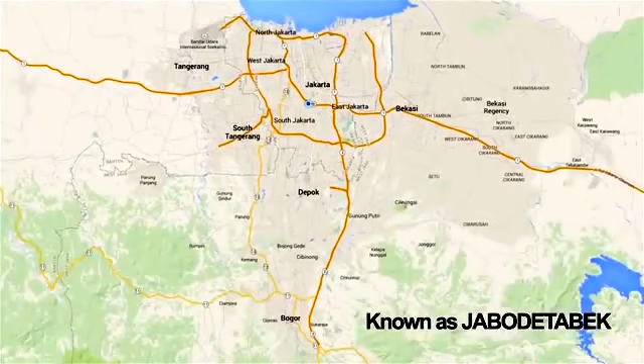Known as Jabodetabek, a name formed by combining the initial syllables of Jakarta, Bogor, Depok, Tangerang, and Bekasi, it is the second largest in the world. Yet the metropolis's suburbs still continue beyond it. With 28 million people in the metropolitan area, nearly 10 million vehicles in daily use, and a limited rapid transit system, Jakarta is strained by transportation problems.

The alternative solution to Jakarta's transportation problem shall be providing mass rapid transit that is environmentally friendly and powered by electricity. By adopting the system utilized in other countries such as Singapore and Japan, the Government of DKI Jakarta established the organization that is fully responsible for all activities, from engineering service and construction through operations and maintenance. The organization is PT Mass Rapid Transit Jakarta.

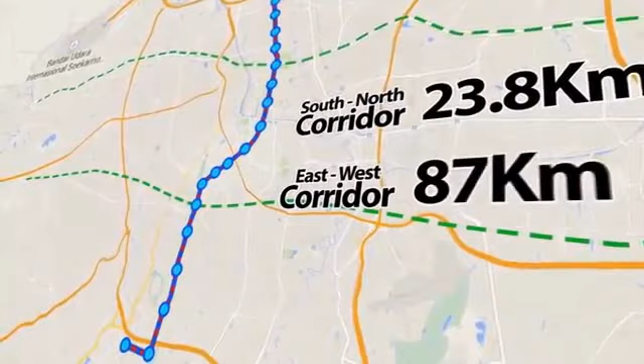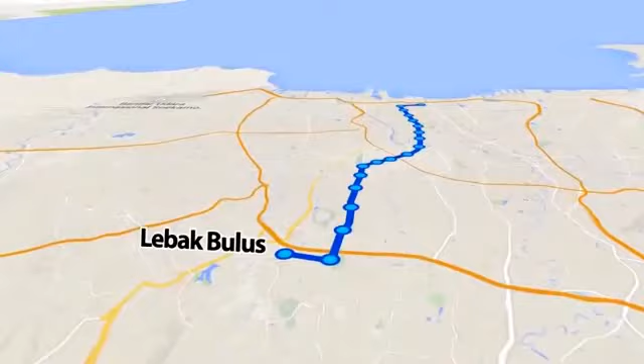Rail-based MRT Jakarta will stretch over 110.8 km of Jakarta roads, consisting of a South-North corridor of about 23.8 km and an East-West corridor of about 87 km. This project is funded through a step loan by JICA and includes the first subway line in Indonesia. The construction of the South-North corridor that stretches along Lebak Bulus to Kampung Bandan will be carried out in two phases.

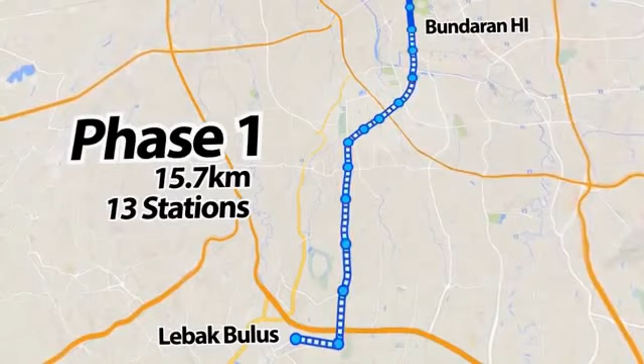Phase 1 will be carried out to connect Lebak Bulus with Bundaran HI over a 15.7 km railway with 13 stations, 7 elevated stations and 6 underground stations, which is targeted to operate by 2018. Phase 2 will expand the South-North corridor from Bundaran HI to Kampung Bandan over an 8.1 km railway, whose construction will have been initiated before Stage 1 operates.

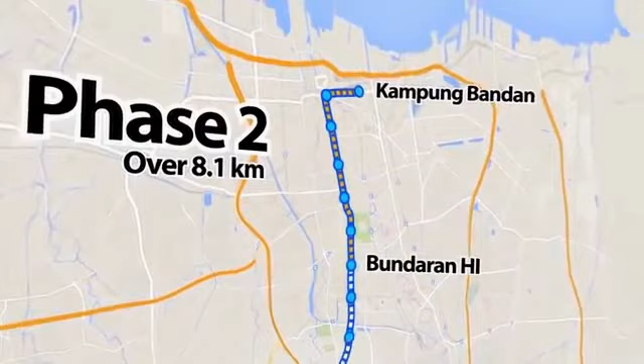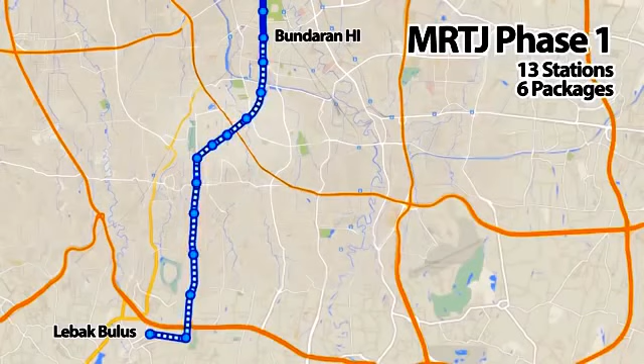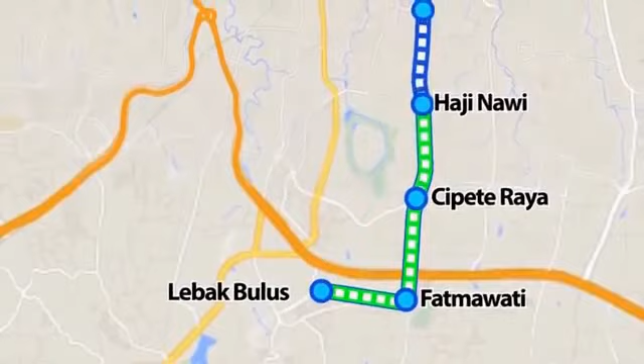The construction of MRT-J Phase 1, which includes 13 stations and 6 packages, has commenced since August 2013. Elevated packages CP101 and CP102 consist of Lebak Bulus, Fatmawati, and Cipete Raya stations along 5.95 km. Elevated package CP103 consists of Haji Nawi, Block A, Block M, and Sisingamangaraja stations along 3.84 km.

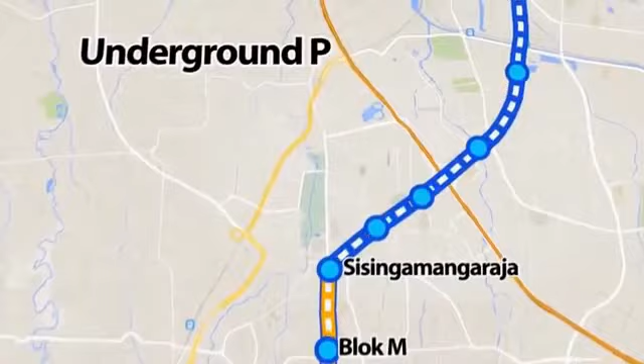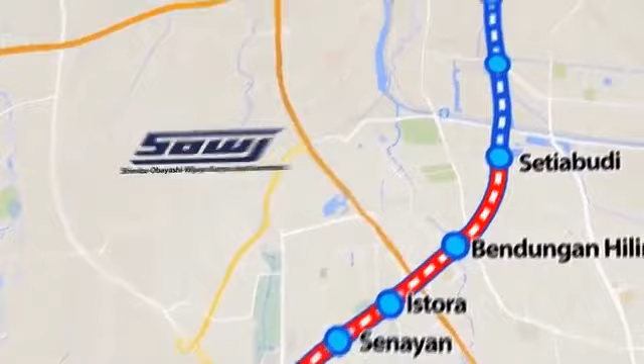Underground packages CP104 and CP105, which consist of the transition area, Senayan, Istora, Bendungan Hilir, and Setiabudi stations along 3.89 km, are carried out by Shimizu Obayashi Corporation from Japan, and Wika and Jaya Konstruksi from Indonesia. Underground package CP106 consists of Dukuh Atas and Bundaran HI stations along 2.02 km.

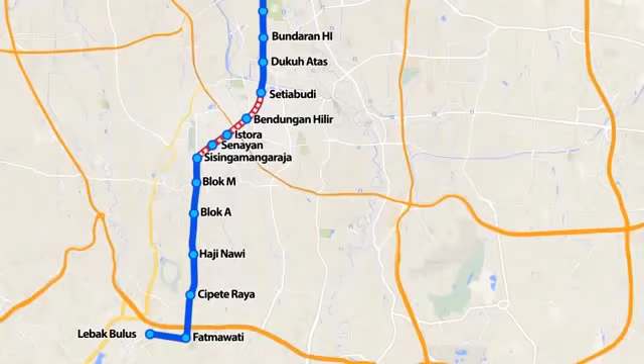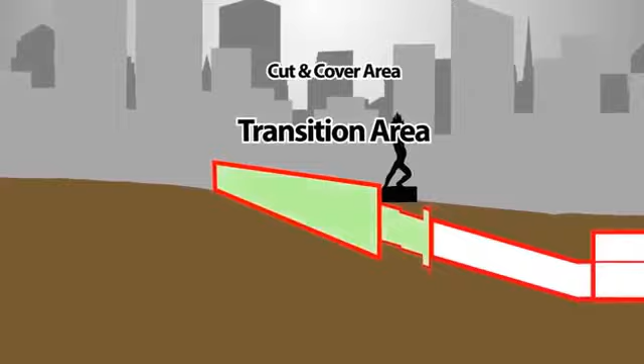SOWJ is the abbreviation of the Shimizu Obayashi Wika and Jaya Konstruksi joint venture, which constructs the CP104 and CP105 packages. Those packages are underground packages that include transition area, station and tunnel construction with a total length of 3.89 km. The transition area, or cut and cover area, will be located from Sisingamangaraja Road until Bundaran Senayan along 460 meters. This area is a transition from the elevated structure of the CP103 package to the underground structure of the SOWJ packages, which will be constructed by the soldier piling method.

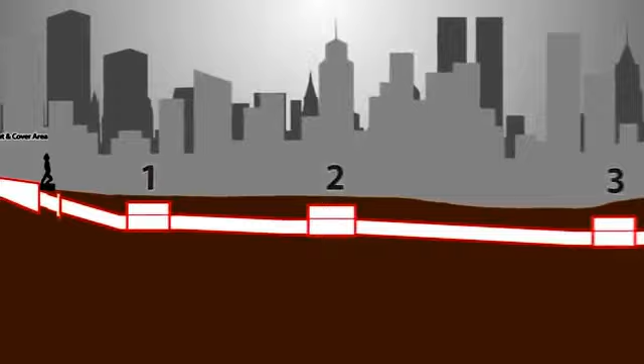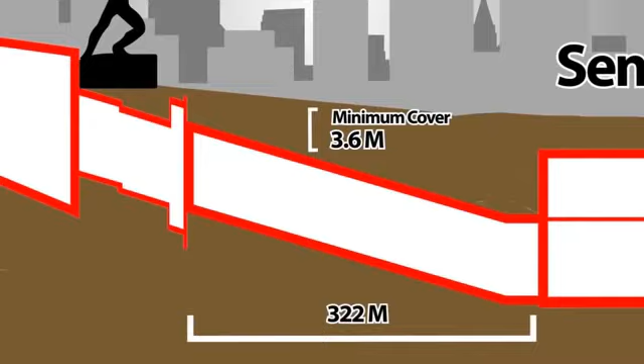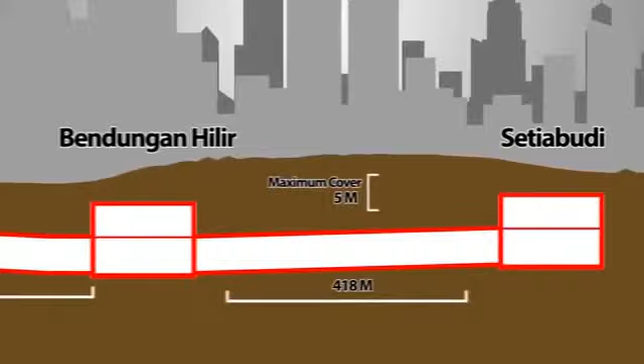There are 4 stations, Senayan, Istora, Bendungan Hilir, and Setiabudi, that will be established. The distance from cut and cover to Senayan station is 322 meters. The distance between Senayan and Istora station is 630 meters. The distance between Istora and Bendungan is 1080 meters, and from Bendungan to Setiabudi is 580 meters. The length of each station is 200 meters, except for Istora station, which will be 220 meters.

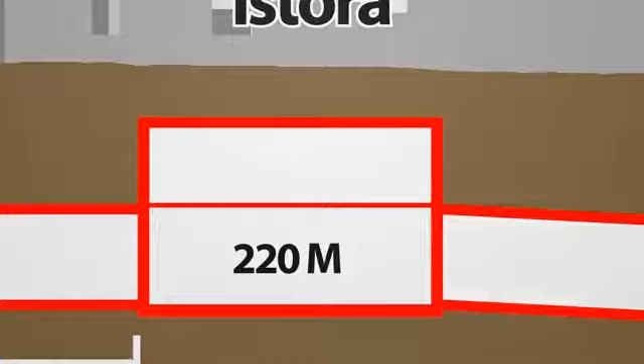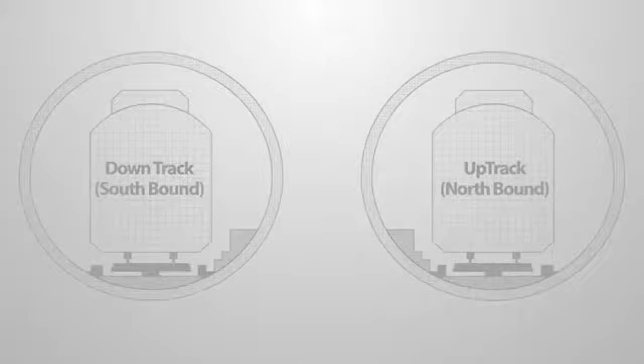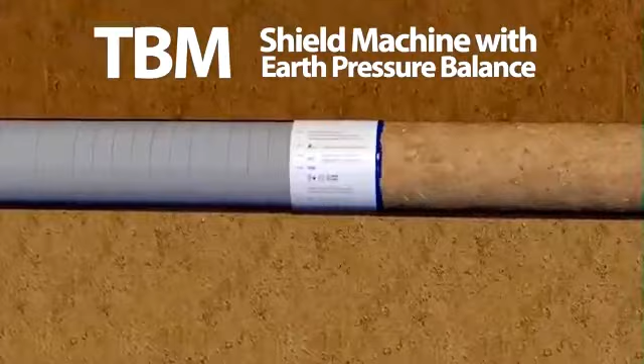The tunnel structure is for the railway of the MRT-J train. The tunnel structure consists of 2 lanes, the down track or southbound, and the up track or northbound lane. This facility will be constructed by tunnel boring machine, also known as TBM. The TBM that will be used is a shield machine of the earth pressure balance type. The required inner diameter of the tunnel is 6,050 millimeters. The tunnel is completed by reinforced concrete segments as the supporting lining structure.

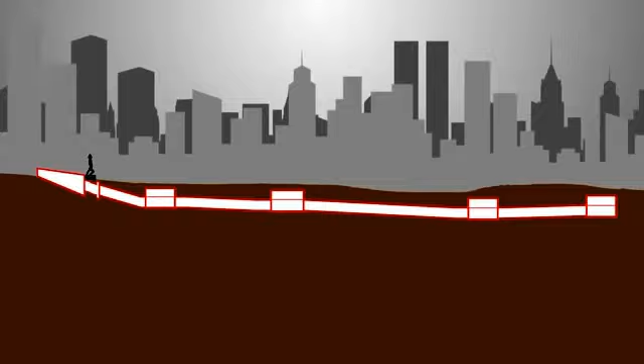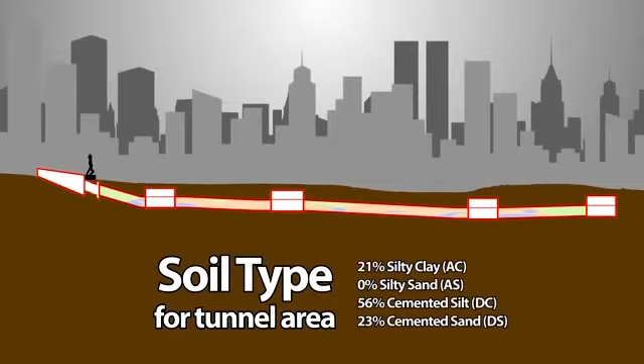According to the geotechnical report in the CP104 and CP105 project location, the tunnel alignment along Jalan Sisingamangaraja through Jalan Sudirman consists of 21% silty clay, 0% silty sand, 56% cemented silt, and 23% cemented sand soil types. This soil condition will affect the type of TBM utilized for this project. The majority soil layer passed through by the TBM is cemented silt. Due to that condition, the type of TBM selected for this project is the earth pressure balance shield machine.

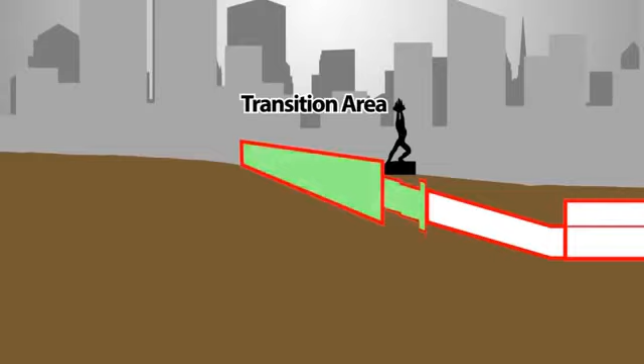The cut and cover area is located on Sisingamangaraja Road, bordered by the CP103 package, until the Pemuda statue at Senayan. This area is the transition from elevated structure to underground structure. The cut and cover area is constructed using the soldier piling method. H-beams will be used as the major material of the soldier piles. Before driving the piles, the position, alignment and orientation of the piles must be established.

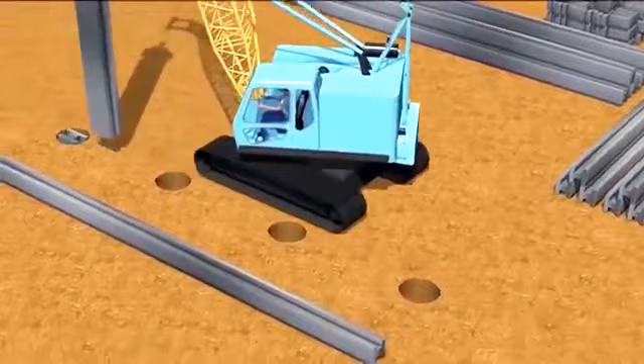Piles will then be driven by a vibrator hammer unit into the marked position. Piles shall be driven in a straight vertical position, otherwise driving will be difficult. All piles will be inspected for excessive camber or sweep. After completing the soldier piles, excavation of the first layer will be carried out, and then a temporary deck and the first whaler strut will be installed.

Excavation for the second and third layers of the base will be continued. The bottom layer will be completed with blinding stone and lean concrete. The process of base slab concreting can then be started.

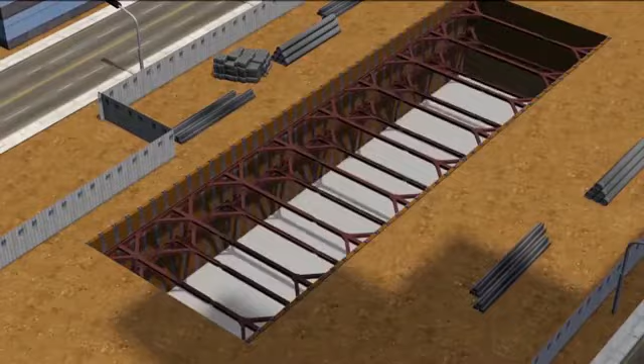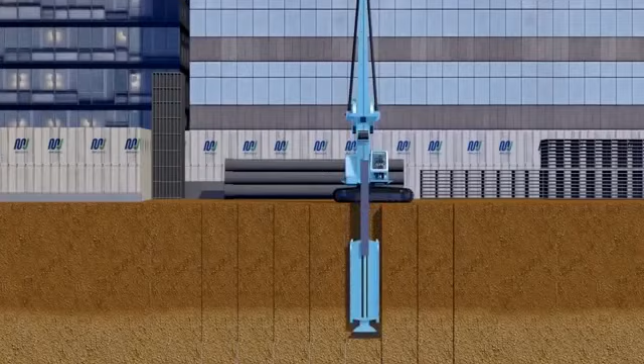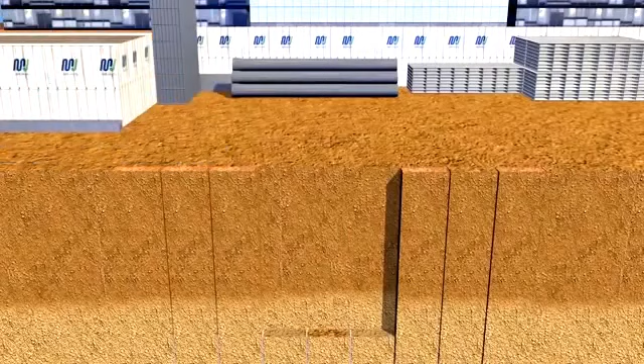The station is constructed using a top-down method. In order to retain the soil and water pressure while commencing a deep underground excavation for main station boxes, diaphragm walls will be constructed. The trench is excavated using a mechanical and hydraulic clamshell, and then a reinforcement bar cage can be lowered down into the excavated area. The next step is pouring the concrete, which is carried out by Tremie method. This cycle is repeated for all four sides of the station.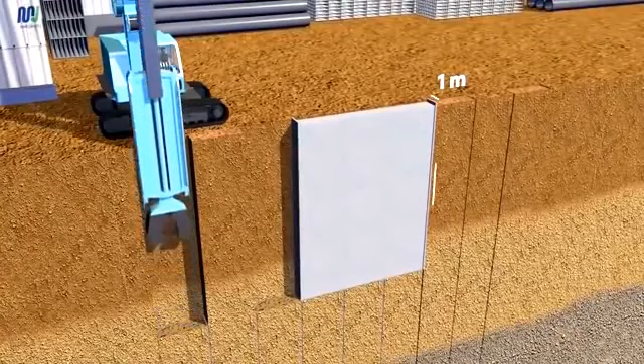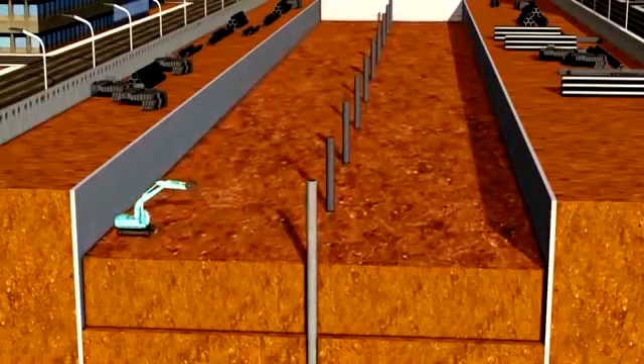The diaphragm walls will function as temporary retaining walls during construction and also as a permanent retaining wall for the station structures. Before starting the excavation process, king posts must be installed as a temporary support for the roof and floor slabs. The first excavation will be conducted and followed by the casting of roof slabs. With openings around the king posts, the second excavation can be conducted.

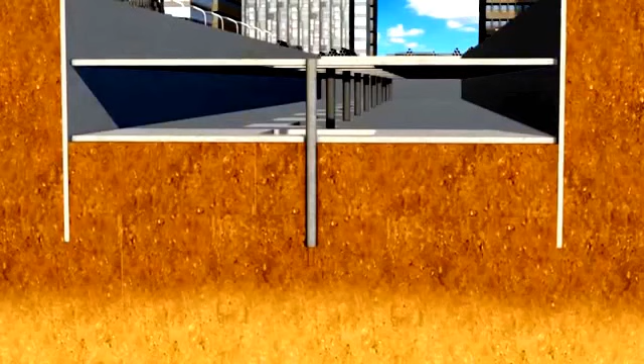After installing the concourse slab, a concourse column will be cast, and then the third excavation can be conducted. Before casting the base slab, blinding stone and lean concrete will be installed. The final process is backfilling the roof slab with soil and compacting it by grader and vibro roller.

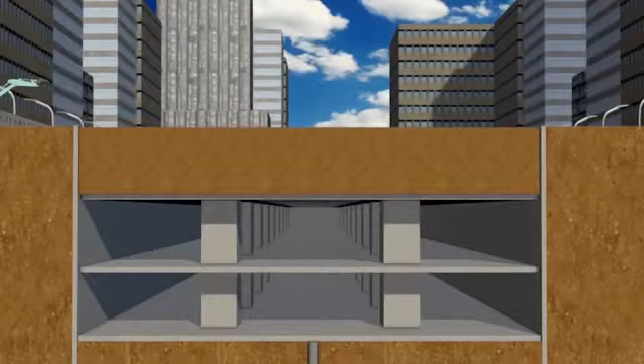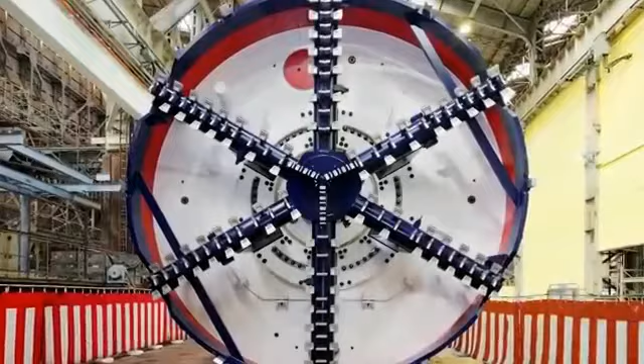The EPB shield machine is not designed as a whole complete component. Shield machine assembly is located at the launching shaft beneath the Pemuda statue, Senayan. This machine is formed by some parts which have special functions for the tunneling work. When the TBM is completely assembled, it will be positioned facing the tunnel eye seal. The TBM will then slowly proceed forward. The tunnel eye will be broken by the TBM roller cutter. The TBM will then break out of the launching shaft and enter into the ground.

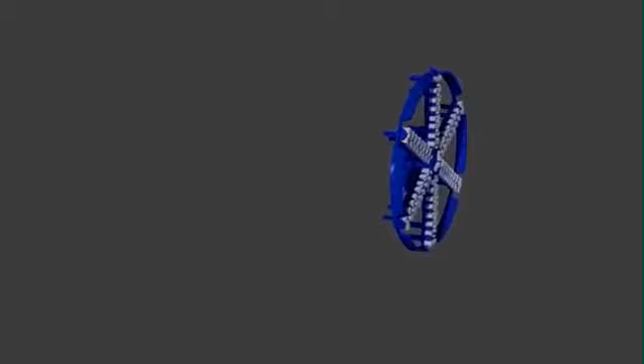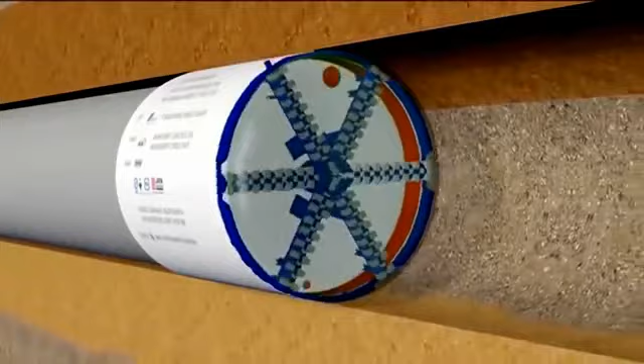The cutter head is the main component for excavating the soil. This project requires a circular spoke type cutter head structure and flat front shape. To simplify the excavation process, a chemical injection will be required to produce a soil excavation result that is suitable for discharge by the screw conveyor. The chemical will be injected both at the face of the cutting wheel and within the cutting chamber. This chemical will be mixed with excavation material by rotation of the cutting wheel and the mixing arm.

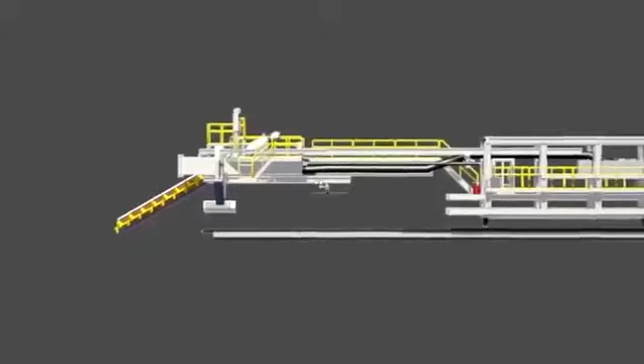After the cutter head rotates to excavate the soil, the disposal will be transported to a screw conveyor. The screw conveyor is used to deposit excavated material from the cutter head chamber onto the hose along the backup car. Soil disposal as a result of excavation will be transported from the screw conveyor to the hose system. The screw conveyor has one gate for disposal passed into the 14-inch hose. This hose will end at backup car number 1.

Soil disposal from the backup car area will be delivered by muck car to the cut and cover area. The full muck car will be hauled back to the opening by locomotive, hoisted to the surface and emptied into the muck pit. Another locomotive will go back to the TBM carrying the concrete segments and 3 empty muck cars.

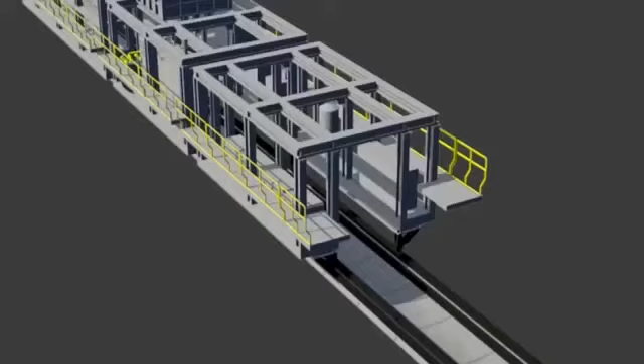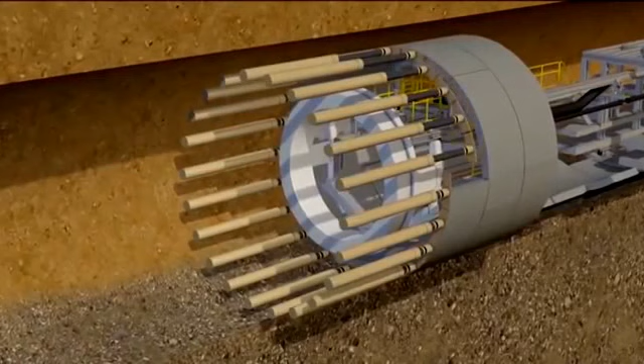After the excavation cycle is complete, the shield jacks are left locked onto the previously built tunnel rings to keep the TBM tight into the tunnel face, and only enough shield jacks will be removed to allow the placement of one tunnel segment at a time. The segment erector can pick up the first segment from the erector pickup area and place it in the correct position in the invert of the tail skin. Each segment is 1.5 meters wide with 25 centimeters thickness.

The segment hoist is then operated to place the remaining segments into the erector pickup area. The ring build is completed by inserting the key segment and tightening all the segment bolts. After the 6 segments have been installed properly, the shield jacks will then push forward and the excavation will continue.

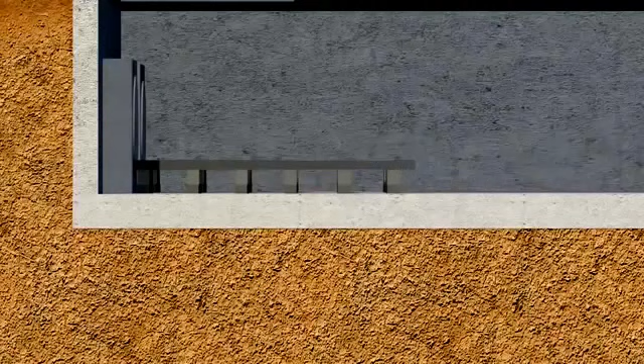The tunnel is finished by installing a concrete invert, which is a permanent structure for the track bed of the MRTJ railway. When the machine has reached a designated distance, the machine will arrive at stations. The final arrival is at Setiabudi station. And then the machine can be dismantled. One by one, the machine parts will be hoisted up to the surface.

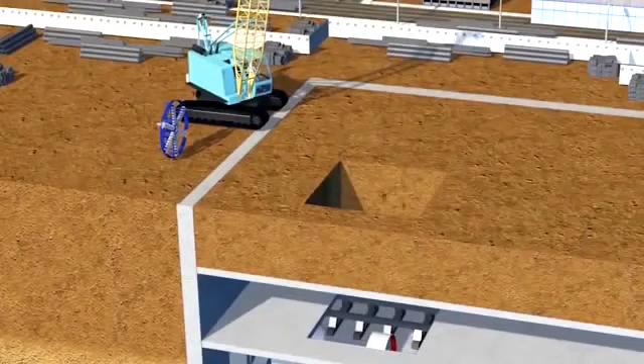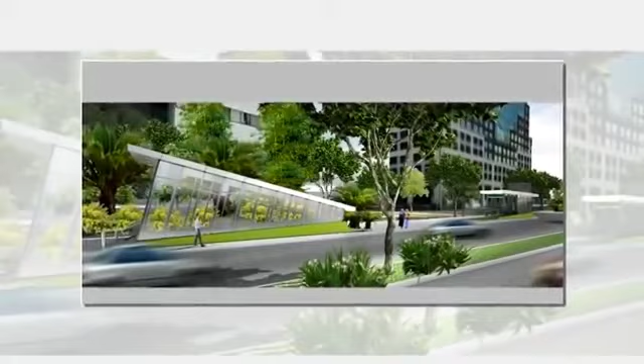After completing the station and tunnel structure, the next step is to install all the mechanical and electrical components, including architectural works. All stations' entrances and exits will be located at the pedestrian area for easy access for MRT Jakarta passengers. MRT Jakarta Phase 1 is expected to carry 412,700 passengers each day. Travel time between Lebak Bulus Station to Bundaran HI Station is only 30 minutes with 5 minutes headway.

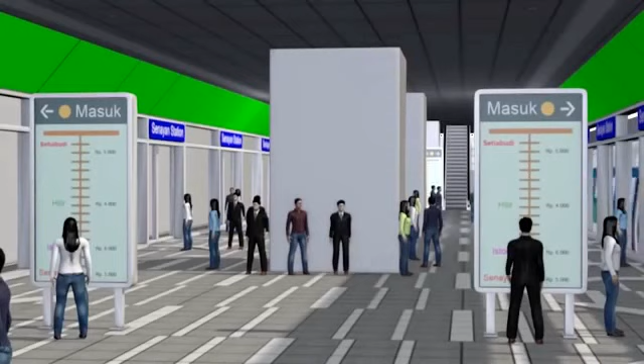This indicates that the target of this operation is for MRT Jakarta to be the primary alternative of public transportation. The final impact of MRT Jakarta will be to reduce the level of traffic jams and pollution in Jakarta. Comfortable and safe travel will be experienced by Jakarta citizens with this MRT Jakarta operation.